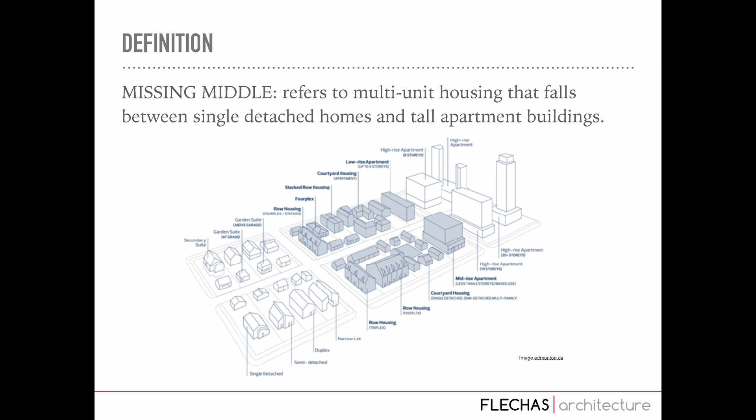What they have as a description typically is like row housing, courtyard housing, and don't ask me why, they have tiny home communities. But that comes in a minute. Stacked row housing, walk-up apartment, low-rise, mid-rise, and triplex fourplexes.

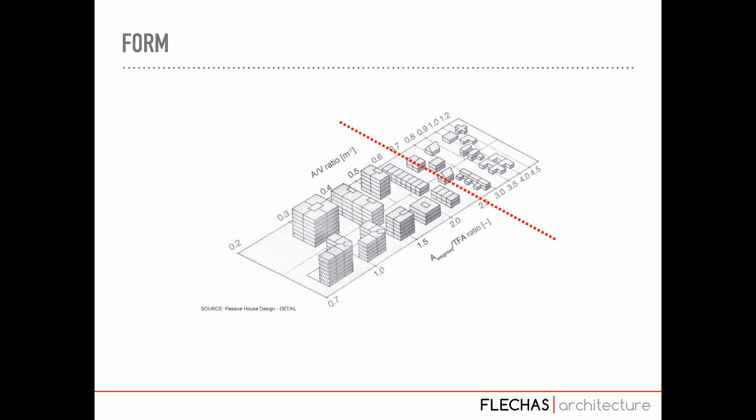The problem here is, for some of you that are not familiar with passive house, is that in Alberta there's a line where this thing gets a little bit easier to make and a little bit harder. It's just the area volume ratio that you have right here. And if you see what that line is like, we almost kill that part of the equation. So you need to be very creative to make it happen.

I can spend 3 hours here telling you about all the zoning in Edmonton. I'm just going to show you one because it's probably the one that is more representative of what we were doing here for this project.

RF5 - if you see when I was mentioning what these tiny houses are doing in the description of middle, it's because you see these clusters. They have this property, but how many buildings? 6? 7 buildings right there. That's what the description of middle housing, the missing middle, will be here.

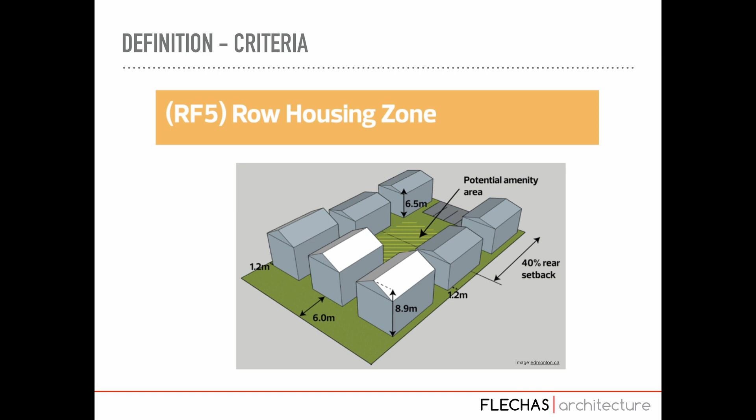And of course, they do a bunch of things just trying to simplify your life. I'm not going to go into detail, but it's like less amenity areas or something like that. That helps, but that's not the end that we want to find right here.

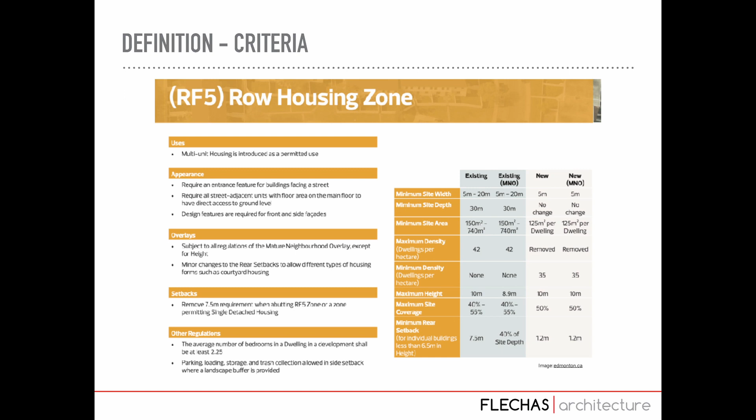So in order to explain how we try to incorporate this in the project to make it passive, we're going to see T5M.

All of the people here from Edmonton? Okay, Curtis, you're not here, but everyone else here.

So this map probably means nothing to you, but it's North Glenora, you probably know where it is. This is the building, one of the renderings of what is going to be there.

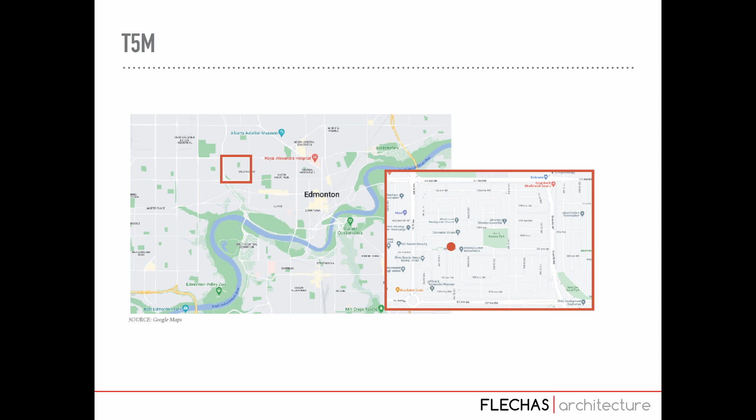This is the floor plan of what we're proposing. It's a little bit more compact building with a courtyard concept and a different type of units - 16 units, 8 units on each building, in a large corner lot. That's what it is.

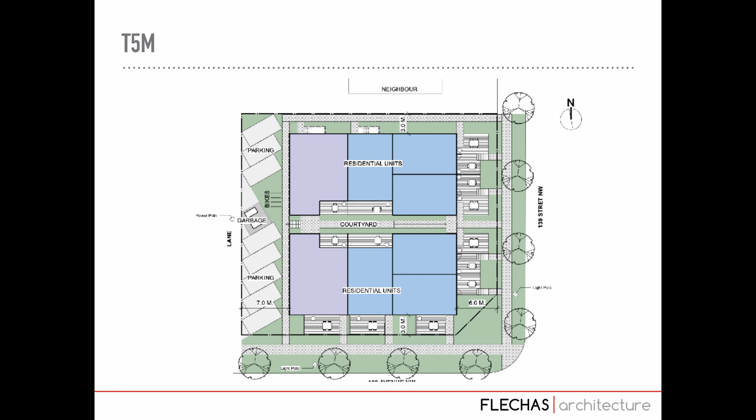So you see it is two separate buildings that follow - hard to read, but if you saw for RF5, the heights are what we're trying to follow with this building. So it's a little bit taller at the front and a little bit lower at the back, just following the same principles or the same rationale from the zoning perspective.

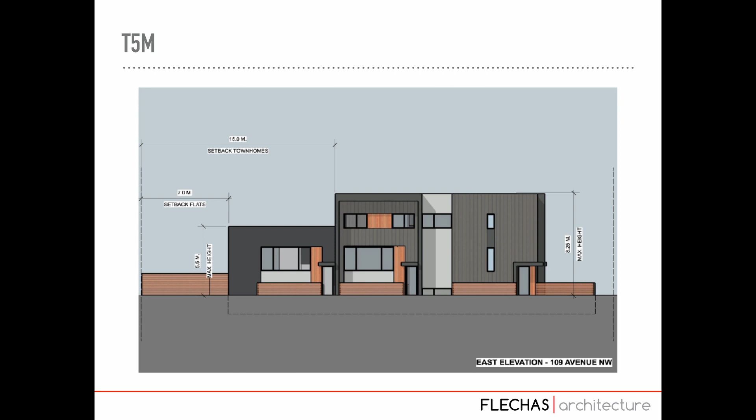That's beautiful. Now the problem is, how the hell do you get that approved? Because it's not on the paper. But the important thing here is that you still have a criteria to go through and believe in that.

So one thing I believe, from the client perspective, is livability. That was important. Second thing is energy and gas, greenhouse gas efficiency, and climate resiliency and operations.

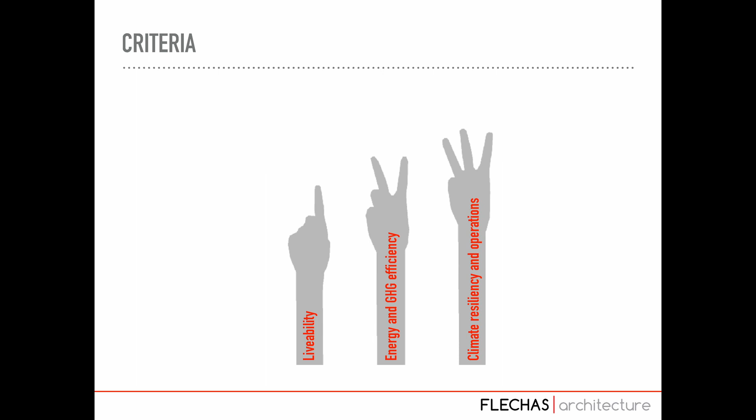I have to say, by the way, that this project, the owner owns this building and it's going to be a rental, and that gives you a little bit of a different perspective of why you would go with passive compared to at market.

Livability, that was important, and the client came to me, and that's why when I show you the courtyard, it's like we need a little bit of social interaction right here. So the shape of the building is part of that. They needed, then we have the two things.

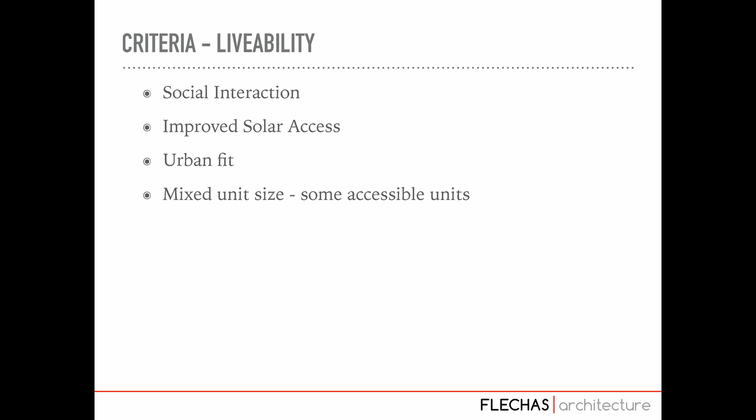It's like we need windows, but we also need to have what we need to make it passive. Improve solar access, things like that. More important, if you want to go technically for a rezoning, because that's the only way you can get

this type of project, is you need to have some urban fit. And finally, it was important just to have kind of a mixed unit size, so even to have some accessible units in the project.

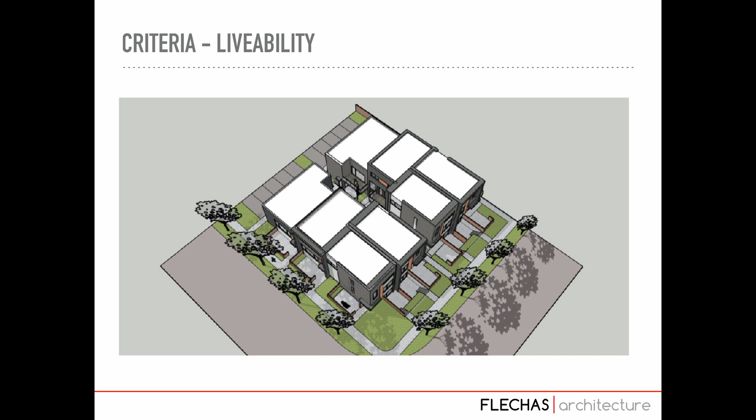So if you see this project, when we talk about livability and probably the design stages, that was the concept: try to have this courtyard where people kind of congregate and all that. If it happens, it will be great, but at least you need to propose many of those things.

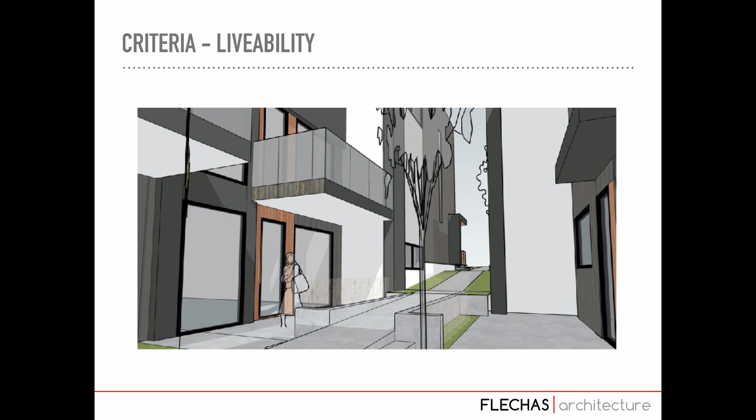You need to go also through the process of convincing your neighbors, as I said, that this thing is going to fit. So we had to do probably a bunch of solar studies to tell the neighbors to the north it's not going to affect them.

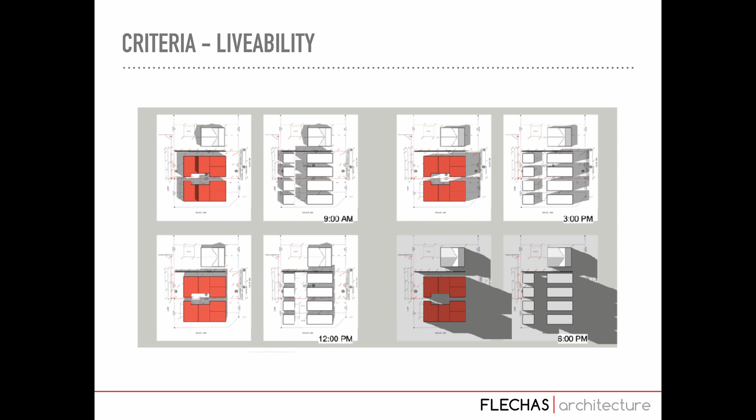We put it, I believe, in many different typologies, but this is kind of the skinnies. If we had developed this site for skinnies, what would have been the impact to the neighbor?

Moving on, so energy and greenhouse gases. Important, that was also a mandate. We want to be a passive house building.

We could have said, no, we want to be almost passive, net zero ready, something. But the plan was, let's do it as passive.

Then it was like, but at the same time, we need to have a very efficient form to make it happen. We need to study envelope and mechanical systems that could work, and also see, and that's what I had in a question mark: it was important to have that embodied carbon.

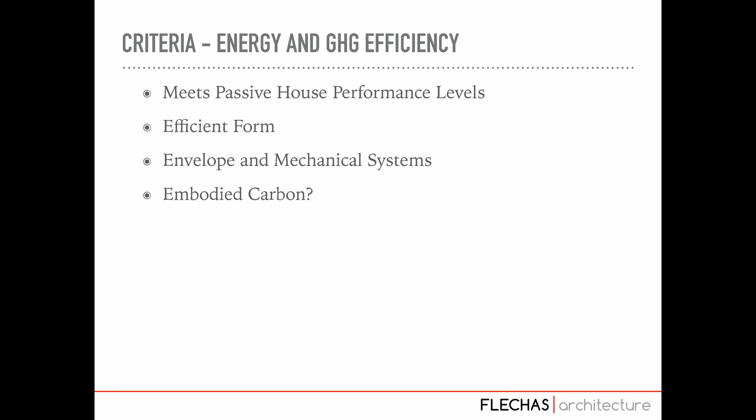It kind of got lost from the process a little bit, but it was always kind of on the back of our heads. Passive buildings kind of probably follow the PHIUS type of way, probably a little bit more on the Passive House Institute type of way. I really don't care, and this project is going to go with the US certification system.

It's going to be that for particular reasons, but in general, we just had many energy efficiency models at the beginning, trying to see where we were going to go.

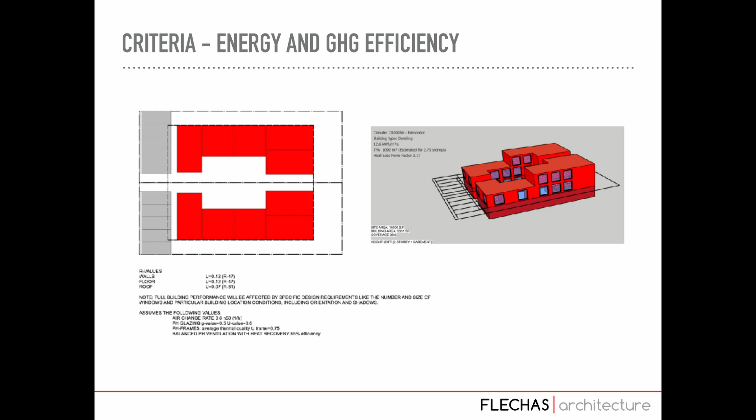I'm not going to show everything, and probably you're not going to see anything of what is in there. But what I'm going to tell you is, and I need to look here because it's just probably 10, 11 envelopes and 5-6 different mechanical systems in all those variations, to see what was kind of the perfect solution for this.

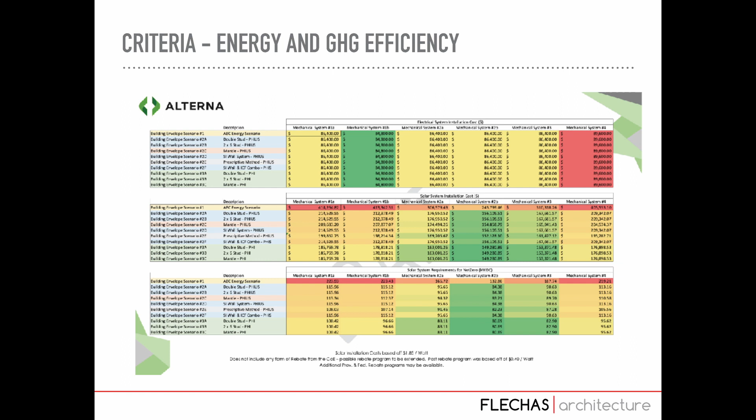All of that informed a decision of which way we were going to go. Finally, there was the component of climate resiliency and operation. There was still a net zero goal, even though we were doing passive design. The second thing is that because it's a rental, it needs to be durable.

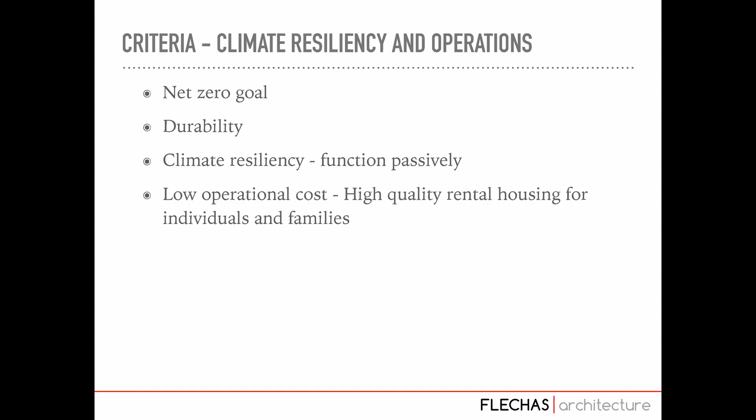There's this component of climate resiliency, so it needs to function passively, with low operational cost. It's a high quality rental building for individuals and families. That's what the owner is technically doing. We're probably still doing the final touches, and hopefully if we can put all that solar on those roofs, we'll just make it. It's still a little bit of fine tuning, but hopefully it gets there.

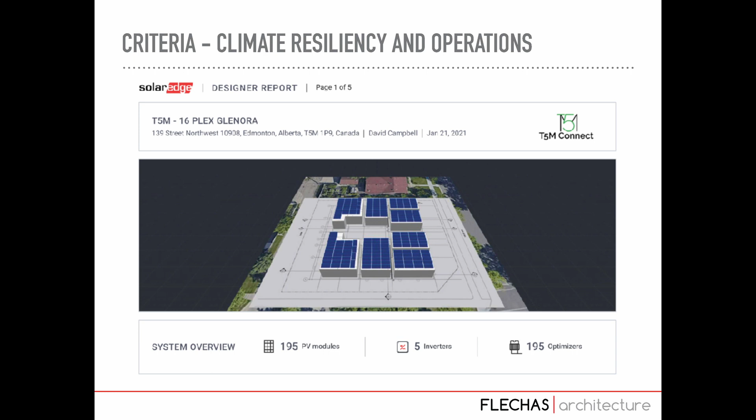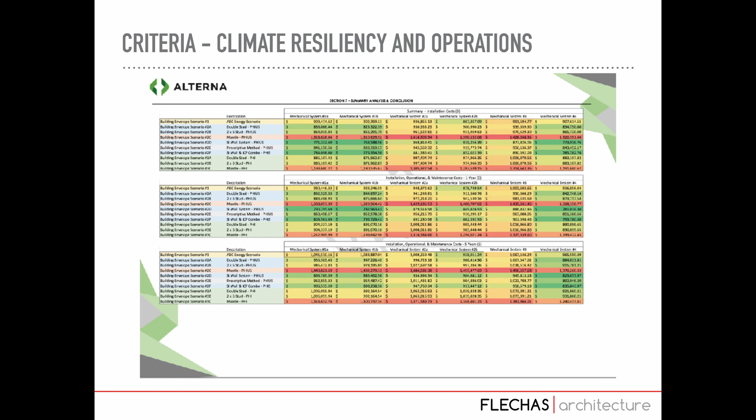And it was the same, climate resilience and operations. If you see that same graphic, it was projected over time. What happens when we have to maintain the equipment? What happens in a year? What happens in 5 years? We even projected, I believe, to 25 years. Because sometimes the system that you see today is not going to work down the road, or it's going to be really costly to replace or repair. So that's still something important.

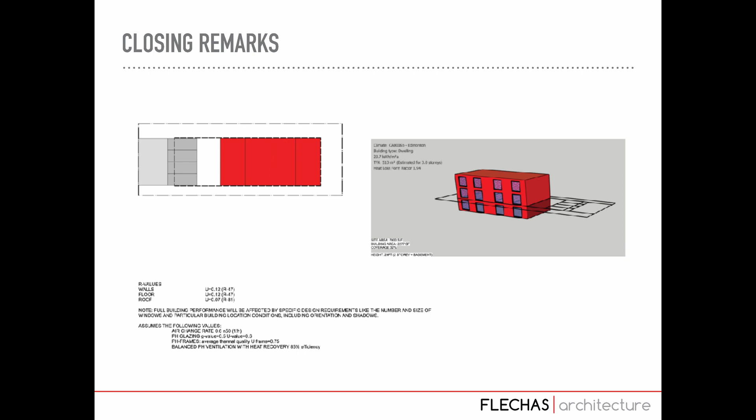This is kind of the happy and the sad part of the whole story. I made a bunch of models for different sites as part of the grant with the SSRI, of what happens if we do certain types of buildings. This is a building that can be done, I believe it's an RF3. With the setbacks and all that, it's not as energy efficient. You still need to find a site that is probably south-facing, that type of thing. But the benefit of that building is that it gets approved very easily.

So now the story, this is a building done like that, not passive. The beautiful part and the sad story here is that we started the same day, with the same builder, one building non-passive and one building that was going to be passive. We finished this building and received almost the same result. So we finished one building and we were only finishing rezoning on the other. So you just start thinking, why would I do this type of building if it's going to take me way too long to get there?

It's the money, the financing, all those things you need to take into account. That's something probably city policy wants to change. But the book says you need to go through a process, council needs to make that decision, I don't know how many readings, and back and forth with the neighbors and all that. We were lucky that the project kind of got moving on a different project, but we were lucky that the support from city staff was all in.

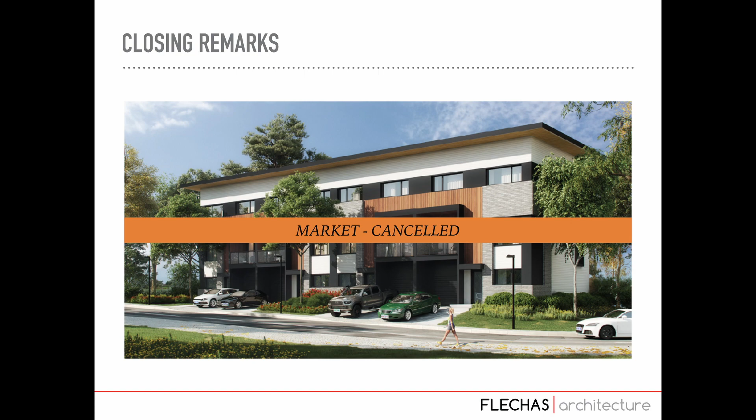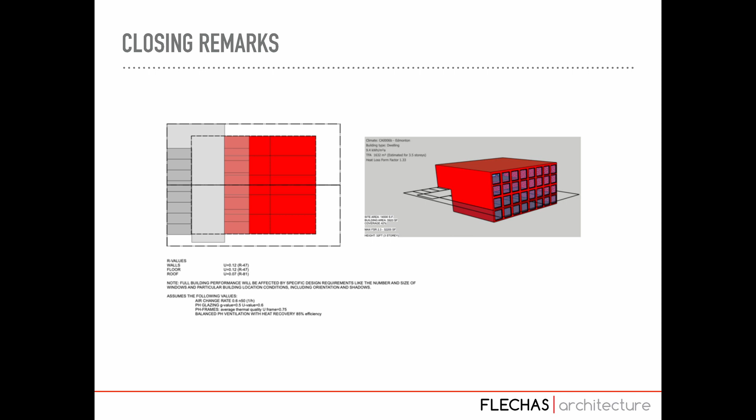If you ask me, it's not the end of the world, there are many possibilities. We keep modeling things on different sites. Technically, making it bigger is a little bit the way to go. It's technically less effort - you still spend the same amount of time doing the rezoning, but at the same time you can have labor forces just supervising the sites, because if it's too small, you probably don't have the same amount of people or resources as when the building is a bit bigger.

I usually close my presentation with these two screenshots, because we cannot really be discouraged by something like this. I think we're positive for Dave here and the owner here. They're building on this. I'm glad that's a good opportunity for anyone who wants to chat with them later, because this is a total experience. It's one of those things where you say, I'm learning, I still don't know, we're in the process, it's probably hard to say we'll do it again, especially when you're just writing checks for this thing, but at the same time it's so rewarding to know you're doing this type of thing.

Why? Because energy efficiency really is the key to the future of energy supply. I bet I don't have to convince anyone here in this room, but there are many people out there who still struggle with that concept.

Finally, this is from the Pembina Institute report on Passive House, many years ago, I believe around 2016, 5 or 6 years ago. It says each building that is allowed to be constructed at suboptimal efficiency is a 50-plus year liability in a world that needs to be fully decarbonized within 18 years, I believe now - they keep moving the target, it's not 30 anymore. So we're kind of late, and we need to act right now.